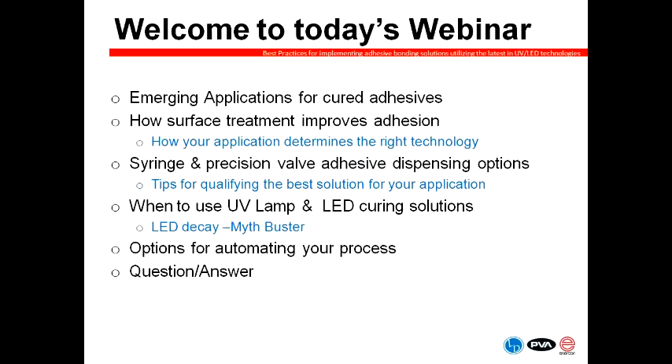We'll talk about when to use UV lamp and LED curing solutions, and Mike will bust one of the myths about LED decay rate. We'll also talk about options for automating your process, and again, we'll reserve time at the end for a question and answer session.

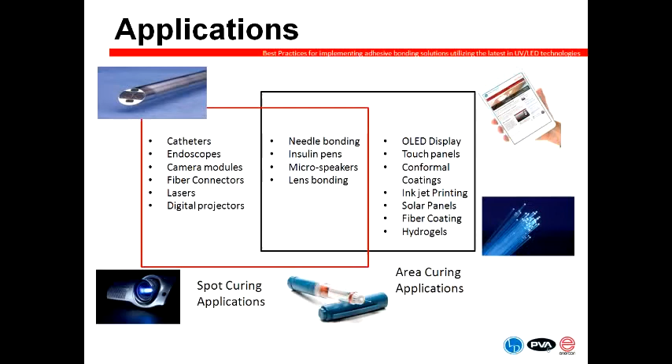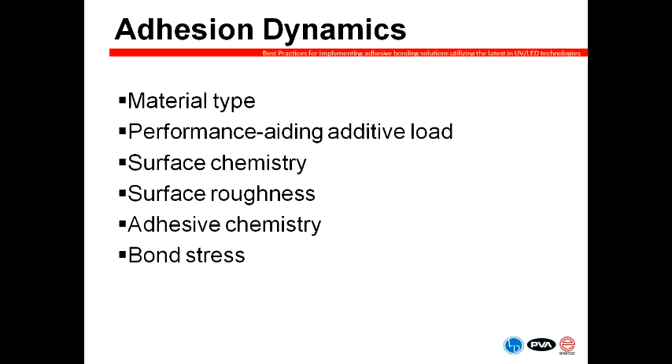For example, some materials are inherently easier to treat than others. A difficult material we see quite often is anything in the fluoropolymer side. These tend to be very difficult to treat, although we do have some technologies which will allow that. Chemistries of both the adhesive and the part you're treating play a role. Ultimately, we need to find a technology that helps alleviate any challenges that you face.

Contamination is also an issue, and that can be everything from mold release to maybe a part that's been sitting around for a number of months and is just dirty or dusty. Additives which migrate or bloom to the surface can be a surprising issue.

Sometimes one of our customers will run a part, treat it, and bond to it one week, and then a week or two or three or four later they run the same part, maybe the same batch, and they're having problems. Often we'll find in those cases it's blooming additives that cause their issues.

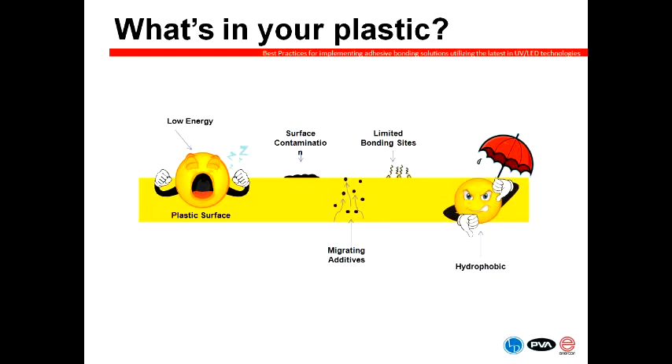The final piece is limited bonding sites. All of these contribute to a surface being hydrophobic or not wanting to accept an adhesive.

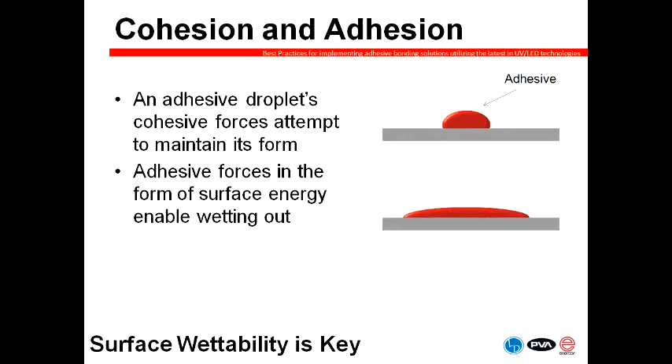This contrasts with the lower image, where the adhesive wets out, lays down, and ultimately forms a strong bond with the two parts you're looking to bond together. What we are doing by preparing the surface is lowering this cohesive force and ultimately creating a stronger bond.

You have a variety of solutions to help prepare the surface for your part. You can use a liquid primer. This is a commonly used process that faces a few challenges. One, it's a secondary process that you either have to apply by hand or with another piece of equipment. And then you also have environmental concerns as well as the cost that goes along with the primer you use.

Mechanical preparations, such as skiving, maybe in the folding carton industry - this is another case where there's a wear part that you're going to run into. There's cost associated with that, there's time, and it tends to create a fairly dusty environment.

Vacuum plasmas provide a solution to both of these first two items, in that you take a batch process, put your part in, and use a plasma technology to treat the entire surface. Fairly effective, however, they are fairly capital and time intensive. They tend to be batch processes, so your throughput tends to be a bit lower.

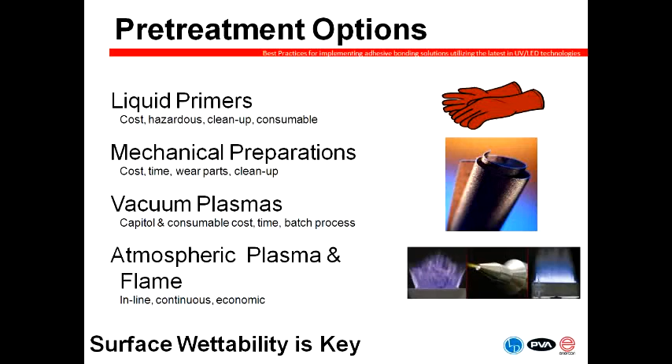Throughput is one of the areas where atmospheric plasma and flame plasma solutions tend to shine. They are inline, continuous, can be robotic, and fairly economical.

One of the questions we get quite often is, what is plasma? I tend to describe it as an ionized gas. More correctly, it's a mixture of charged ions and energetic electrons in equilibrium.

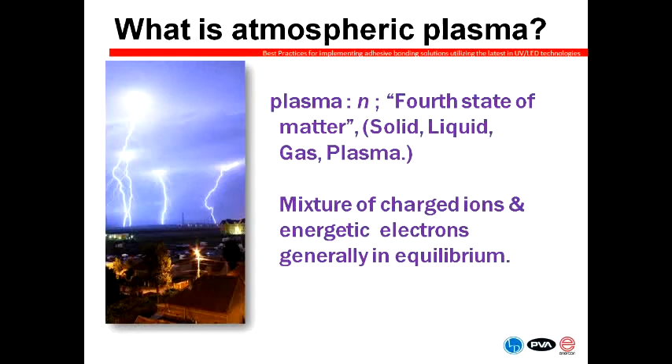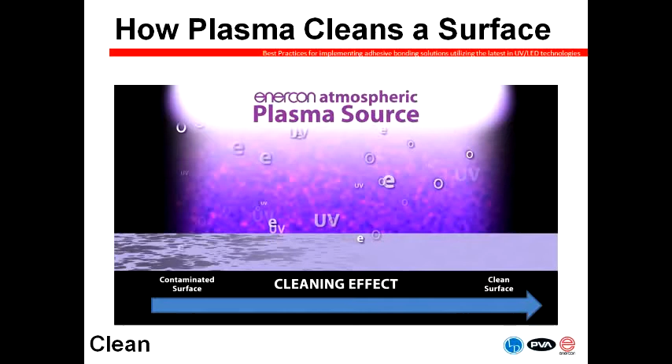One of the barriers to surface adhesion I mentioned earlier is a contaminated surface. This can be organic or inorganic materials on the surface, essentially low molecular weight materials. The charged ions and energized electrons present in the plasma treating process help clean and remove this contamination.

Cleaning a surface is not the only thing we're doing when we plasma treat. In addition, we are creating more bonding sites by micro-etching the surface. In some applications, we take it even further by adding a reactive gas into the process, which leaves a functionalized molecule on the surface designed to enhance adhesion with specific chemistries.

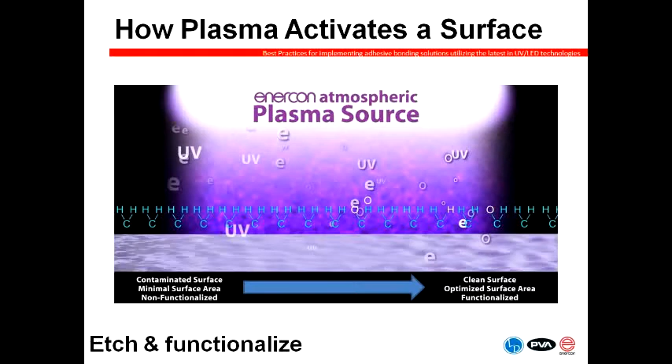So now I want to talk a little bit about what the different types of plasma treating systems are and how you would go about selecting one for your application.

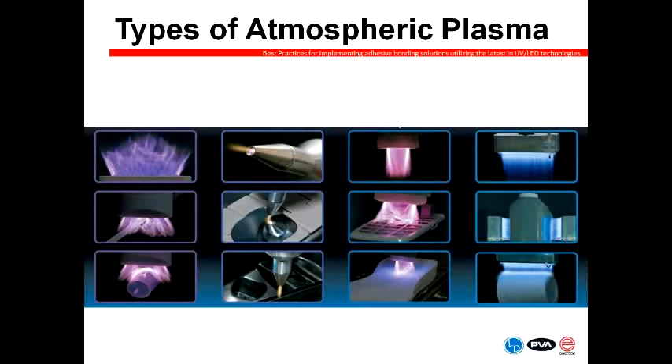So this is a great gallery of the different types of plasmas that we'll talk about. I'll review them here quickly and then we'll go into depth a little bit more. So the column on the left you see, that is our blown arc plasma treating solutions. The second column are what we call blown ion plasma treating solutions. The third column is an example of variable chemistry plasma. And the final column all the way on the right are examples of our flame plasma treating technology.

So blown arc plasma is created by passing a high voltage electrical discharge between two electrodes. If you look at the picture on the top, you see the purple discharge coming out. There are two metal electrodes right beyond that, and the charge jumps back and forth between these two metal electrodes in the head. It's useful for a wide variety of applications. Generally, it treats anywhere from 2 to 3.5 inches with a single head. Multiple heads can be combined for wider treatment patterns.

An important thing to remember about blown arc is that they can only be used to treat non-conductive materials, that is, any non-metallic materials. This is important not only for the material that you're treating, but also whatever carrier you are using to move your part down the line. This tends to be best for slower speed applications, say in the neighborhood of 30 feet per minute.

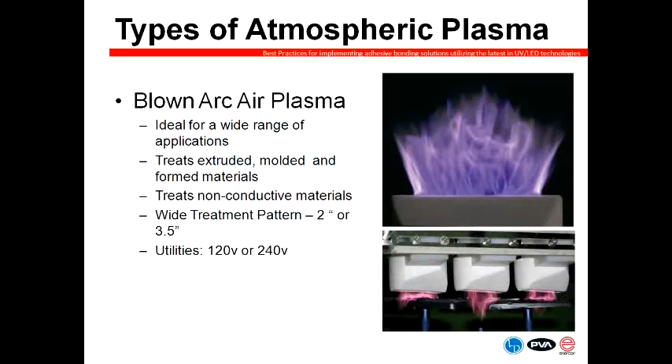The secondary plasma technology is blown ion plasma. The plasma here is generated inside the head, and the resulting ions are blown out via compressed air, and that's the yellow and purple discharges that you see in these pictures. It tends to be a very versatile treatment method in that we can treat both conductive materials and non-conductive materials. The treatment width is a bit narrower than blown arc systems at about half an inch wide.

And these are particularly great for adhesive applications. They're often used to treat glue tracks in automotive headlamp applications, glue flaps, and folding carton applications.

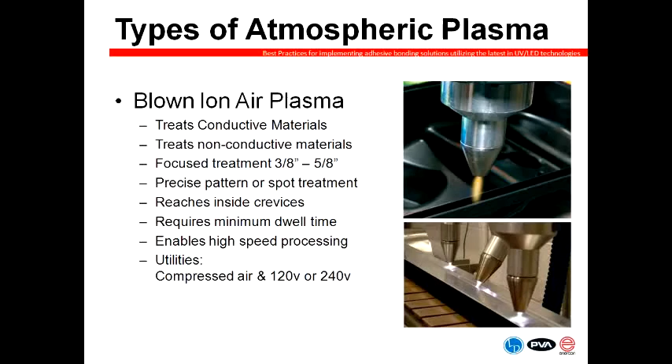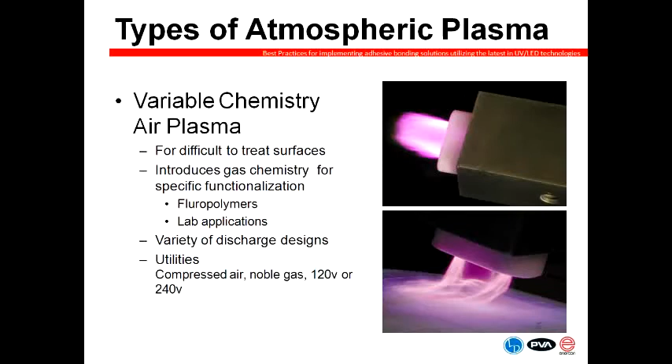Variable chemistry plasma is very similar to blown arc, except that we are adding an inert gas into the mix. This technology tends to be used with materials that are difficult to treat. We are able to produce this technology in two formats. What you see in these pictures is about a 2-inch treat width that's used for a variety of objects.

In addition, we're able to custom design a system for flat and wide objects. This could be a flexible material or something rigid like a piece of glass or a piece of plastic.

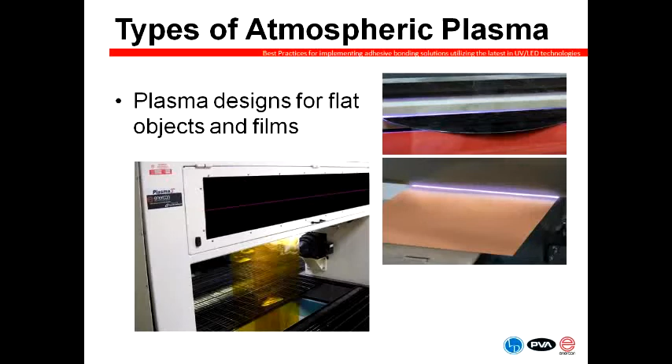The final technology that I want to share with you today is our flame plasma treating technology. Flame treating is probably the technology that most people are familiar with, as it's been around for many years. We've improved upon this technology greatly to create a safe and consistent treatment method. With flame, you're able to treat both conductive and non-conductive materials at extremely high speeds.

The flame's width can vary from as small as 2 inches to over 16 with our standard products, and we will custom design products for even larger than that. The effective treatment area of the flame is also very deep, which allows you to treat objects with great deals of contour.

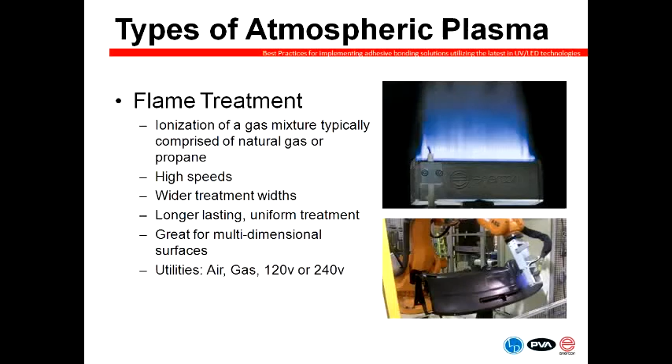So how do you select a treatment technology? What I like to typically tell our customers is try to come in with as open mind as you can. Don't say, I want to use a blown ion or a blown arc technology. Let's take a look at what material you're trying to treat. We have a bit of knowledge as far as, does this material treat better with this system or another system?

The conductive or non-conductive piece comes into the equation like we talked about. The area to be treated, is it a small strip? Is it a large piece? That will impact as well. How is the part handled? Is it traveling down a conveyor? Is it in some sort of puck? Is it rotating on a table? Or is it some sort of robotic application? Those all come into play.

Speed or cycle time that you're trying to achieve is also an important bit. I mentioned with our blown arc, they tend to be a little bit slower. Our blown ion and flame systems tend to be a bit faster, and in slow speed applications probably aren't the right choice.

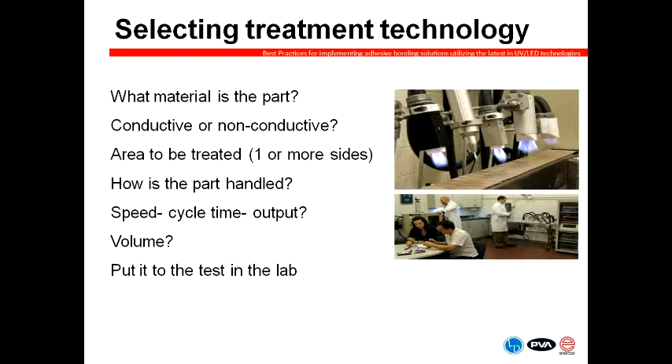All of these we like to do before we take on any application is put them to the test in our lab. We offer free lab testing to determine which technology or technologies might be the best fit for you.

What we're seeing on this slide is a test we conducted with an adhesive company on a polyethylene substrate with UV cured adhesives. The far left bar shows the control sample, which was not treated, and the two on the right, one with blown ion and one with flame, show the bond strength was 3.5 times greater after plasma treatment. The effect can be pretty significant when you choose the right technology combined with the right adhesive and the right curing solution.

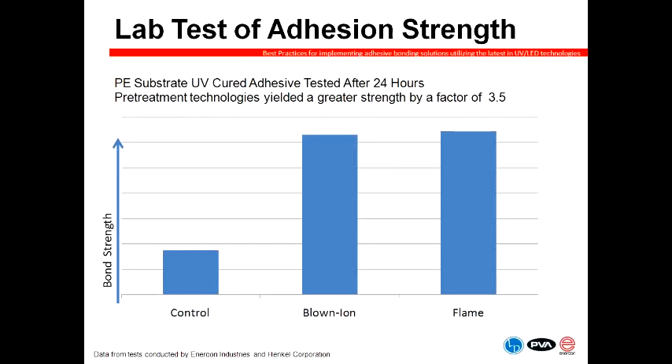To summarize the technologies quickly: blown arc systems are not good for conductive materials, but they're good for wide surfaces and require the longest amount of dwell time. Blown ion systems can treat conductive and non-conductive materials, can treat wide surfaces with automation or multiple heads, and require a short amount of dwell time.

Variable chemistry plasma systems are not able to treat conductive materials. They're good with wide surfaces and tend to require a little bit longer dwell time. Flame plasma systems will treat both conductive and non-conductive materials. They're great for wide surfaces since we're able to build a wide variety of burner sizes, and the dwell time required is very short.

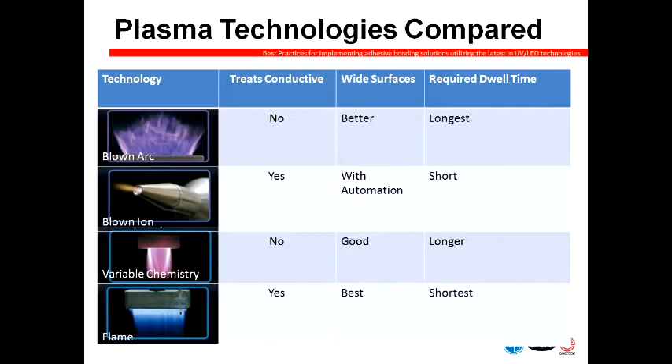Now I'd like to hand the reins over to Frank to talk about syringe and precision valve adhesive dispensing options.

Thank you very much, we're going to go to the next slide. I want to thank everyone for being here today. I was asked to come in and discuss our abilities on the dispensing side for UV adhesives, and they range quite widely across the spectrum, from very simple to very complex solutions.

Typically, to start the evaluation process we want to identify what the best process is from the beginning: what the production requirements are, what type of consistency and quality requirements are being demanded of the application, what human resources are available, and the complexity of the task, as that may contribute to the complexity of the solution.

When you talk about dispensing equipment, you can start with something very simple, like a tabletop and a syringe, and work your way up to a very customized piece of automation equipment. Evaluating the budget and what you expect to get out of a potential solution is always a consideration. These investments can vary widely, from a tabletop solution for under $500 to over $50,000, or more for a very custom solution.

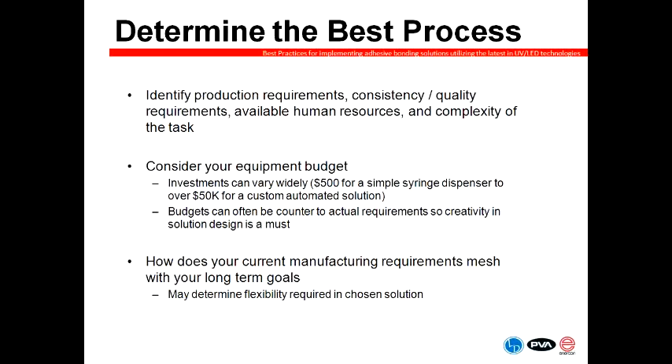I frequently talk to people looking to have capacity and capabilities well beyond what they'll currently need, more so for flexibility's sake than anything else. We can go ahead, Mark.

Some things to always consider when designing a dispensing system: one of the first things we ask is how the material is going to be packaged. Can it be handled very easily? Syringes through drums and anything in between can all be accommodated, but identifying the packaging type in conjunction with the specific chemistry will start to allow a dispensing company like PVA to identify the appropriate fluid delivery system to move the material to the dispensing apparatus.

This can be a factor when determining the amount of pressure required in large production equipment, and subsequently the complexity of whether we're talking about a syringe adapter and mount to a valve, or a large 55-gallon drum pump. Again, all can be accommodated.

It's just a matter of communicating what options there are. Many times the end user may not know this, and that's not unusual, but it can be worked around and addressed fairly readily when working with material partners. Most dispensing companies have those relationships to create a triangle with the dispensing company, the chemical company, and the end user, to determine the appropriate volume to be utilized for a particular application.

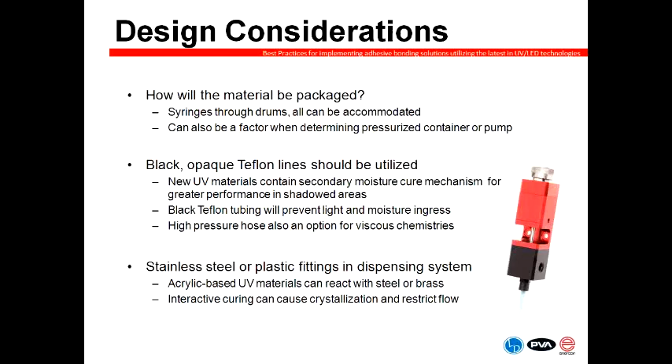We can go ahead, Mike. Or I'm sorry, Mark. Did we skip one there? There you go, thank you.

Another consideration when designing the equipment is evaluating the shear sensitivity of the material. High shear pumping systems tend to come into play as you're looking at a higher degree of accuracy in your dispensing system. Oftentimes gear pumps or other type of metering processes can be utilized. Anything that's got a high shear sensitivity can cause crystallization in the chemistry itself, so evaluating that in the design to avoid the seizure of those pumps is a critical aspect as well.

Typically, peristaltic or diaphragm pumps are preferred when possible, as opposed to shearing UV materials.

Also evaluating what the dispenser or sprayer coverage area is. Now that we've got the material going to the appropriate valve to do the task, what is the appropriate valve at that point to do the task in question? Are we doing a bead application, a spray application? And then also assuring that UV light can access the dispensed materials. In some applications we do have end users that, frankly, rely on the shadow, the secondary cure mechanism, in a shadowing effect, to remedy that situation.

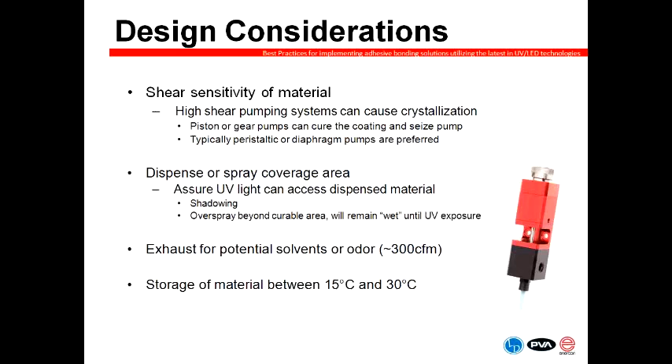Thanks, Mark. You can go ahead.

Jumping on material temperature sensitivity, typically most coating and adhesive dispensing manufacturers will work with a chemical company to evaluate what type of variation there is in viscosity versus the temperature of the material. If we find that the chemistry is very reactive to changes in temperature, and these things can be as silly as a tank sitting next to a heating duct or an open window that may affect the temperature of the material throughout the day, all things I've seen over my years here, those can be stabilized. So controlling the temperature of the material tank, the fluid lines, and the valve itself are all options if we find that the material is very sensitive.

This comes into play more so in a time and pressure scenario. We're relying on consistency in the chemistry to create a consistent application, because there is no metering in the process at that point, so these are more so for our most simple dispensing designs. We can improve this by introducing some sort of diaphragm or gear pump system that will actually proportion the material regardless of small variations in viscosity. So again, this goes back to a design consideration more than anything else.

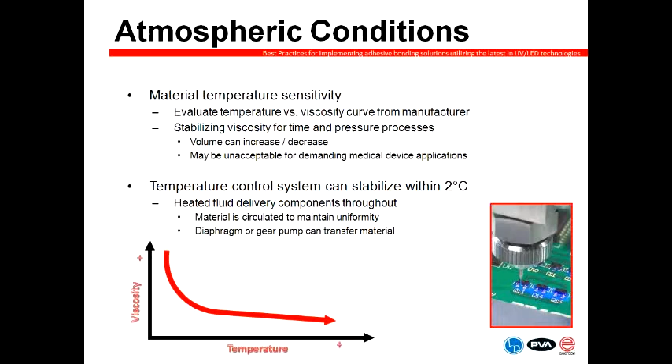We can go ahead, Mark.

This chart is a brief overview of the complexity we're looking at. Typically we'll start from a very manual system to a very automated system, and somewhere along the line we can figure out, based on the conceivable budget, volume requirements, and level of automation required, what's appropriate when determining the right piece of equipment to address this.

You can start very manual with a handheld wand on a tabletop, very inexpensively. Typically these are time and pressure solutions, so the consistency of shot-to-shot repeatability is typically upwards of 10%. They can go lower, but that's probably on the high side.

Then we can introduce various stages of automation, whether semi-automated with a fixed valve position and controlled position of the part itself, improving on relying on the operator to consistently move by hand for the dispensing position—all the way to a fully automated unit that can consistently place both the part and the valve in a reliable position.

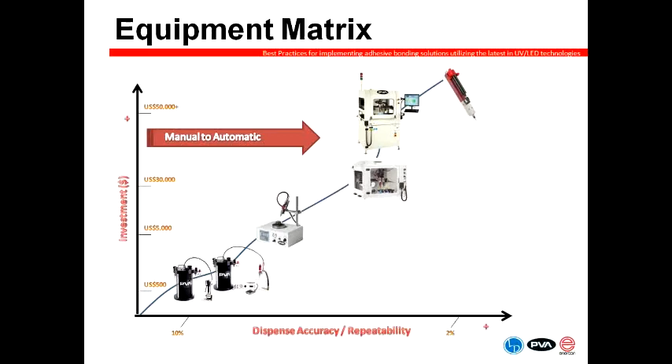The manual adhesive dispenser is typically a time and pressure process via syringe or a dispense wand. This can be done by hand, and it's typically done by hand. You can also add a timed controller that allows shot size consistency—very small boxes, about book-sized, with a digital timer, initiated either via a foot pedal or a hand switch.

All this provides more shot-to-shot repeatability, but if there's motion required from the operator during dispensing, you're still relying on them to assure the desired coverage area is completed. This is the lowest cost equation for getting into dispensing, and the shot repeatability can be nearly 10%.

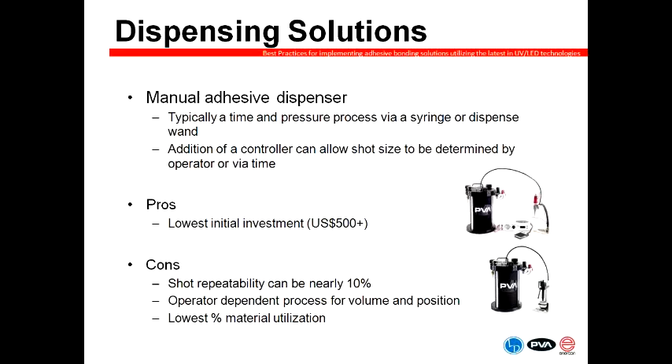For highly accurate, repeatable processes, most customers want some sort of automation. These tend to be more general dispensing applications because you're operator dependent for both volume and position, and this offers the lowest percentage of material utilization due to waste and inconsistency in part or valve position.

A semi-automatic dispenser can combine either a time and pressure solution or a metered solution with some basic repeatable motion. In this scenario, we can address one or both cons of handheld dispensing, providing added accuracy with the dispense shot position, the shot repeatability in a metered solution, or both. There's a higher level of initial investment to get that type of consistency, but the repeatability can vary by the solution.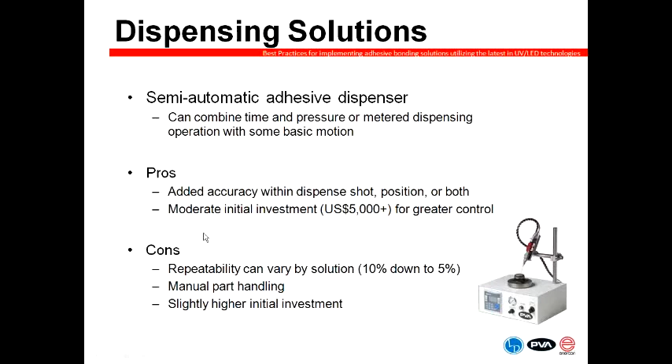If you're staying with a time and pressure method—turning the valve on and off as opposed to metering—you can go anywhere from up to 10% down to 5% or below. The con here is you're still utilizing some manual part handling; it's a trade-off between that and getting added positional accuracy. It's a slightly higher initial investment, but the trade-off is repeatability within part of the process.

The higher level of automation takes the part itself and the valve and puts them in a robotic positioning system. Here you can utilize motion to create a highly repeatable, accurate position for dispensing. Regardless of the dispenser or the robot, dispensing accuracy always falls back to the fluid delivery design. As accurate as a robot can be, these are typically plus or minus 1/1000th of an inch repeatability on each axis.

Shot-to-shot accuracy, whether for a potting or bead application, always falls back to the fluid delivery design. A time and pressure method still won't get you out of the 5 to 10% volumetric accuracy range, regardless of adding a repeatable robotic positioning system. To get those improvements, we need to look at adding some sort of metering device.

The advantages here are that these are typically used for high volume, repeatable processes, so they can be conveyorized or not—many units we manufacture are in-line for high volume production. You get much greater material utilization because of the positioning system, so your material waste goes down significantly.

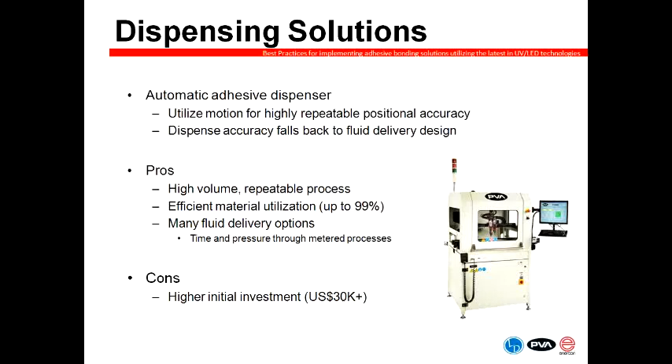In summary, while production requirements will often dictate the dispensing solution, probably very much like we discussed on the surface treatment side, we also like to see our customers come in with somewhat of an open mind, because very many times the solution is not so obvious. There's oftentimes multiple solutions to a dispensing problem or application, and qualifying the appropriate or best solution is really the only way to discover what's going to work best in production.

Conceivably, 2 or 3 dispensing valves, maybe a couple of different robotic cells, could be utilized to do this, and just finding the best one is really where a service and sales engineer can help you determine that. But most applications do come with a general idea of whether there's some sort of demand for automation, and typically that allows us to focus on where our starting point for this application is, and where we want to go as far as designing a system.

Within each segment of solutions, there are various options that we can look at to meet your specific requirements. But the appropriate dispensing partner should be working with you to determine not necessarily their off-the-shelf solution, but more so what's best suited to fit your application, not just now, but in the long run, to make the most efficient use of your production requirements.

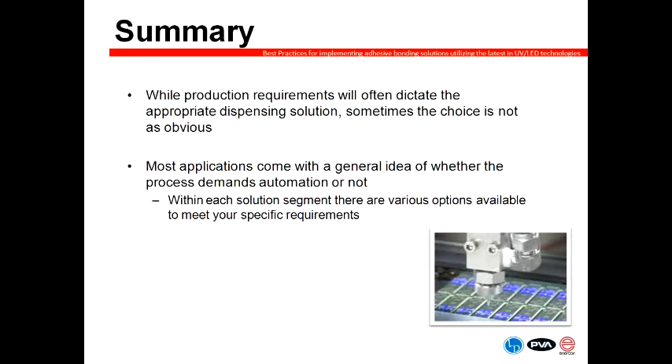I'm going to talk to you for a little bit now about when to use a UV lamp versus an LED curing solution. So, 2 different technologies, both being used today in UV curing applications. Now, at Lumen Dynamics, we design, we manufacture, and we support our customers in both lamp and LED technologies. I will try to give an unbiased opinion on where each one has its benefits, and also let you know some of the limitations of each technology. So if we can go on to the next slide.

I think it's important, before we talk about the different light technologies, to give a quick overview on the way that the curing reaction takes place. UV curing starts with the photoinitiator that's included in whether that's a UV curable adhesive, ink, or coating. And the curing reaction starts when you have sufficient light of the correct wavelength range that is absorbed by the photoinitiator.

That's an important point to note, because every photoinitiator has a very specific spectral range where they'll absorb light and start that reaction. So it becomes obviously critical that you match the spectral output of the light source that you're using with the absorption range of the photoinitiator.

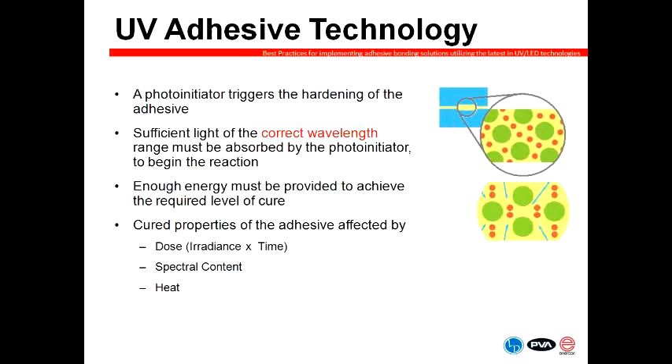It does generate heat, but the light source used, the light technology used in the curing process, can have significant effects on the amount of heat seen by the parts. If this is a consideration with your parts, and often is in many different curing applications where heat is trying to be avoided, this could be one of the areas that determines what technology is best for you.

One limitation, though, is that they're really limited to small spot sizes, and that's how we're able to achieve the high irradiance level of 10 watts per square centimeter, by using a lens to focus that energy into a very small spot. So when you look at the actual optical power coming from an LED spot source, it's only about 500 milliwatts of optical power. It's really not that high power, but because we focus it, we can generate significant irradiance in a small spot size.

Now if you look at a lamp spot curing system, you've got significantly higher irradiance available, up to 30 watts per square centimeter, much higher than you would use for most curing applications. So most spot curing systems will give you the option of adjusting the output down from 30 watts per square centimeter. You can see the spot size is also much larger than available with LED, and that's because a typical lamp spot curing system has about 10 times the optical power of an LED system. So you have the flexibility of using larger spot sizes, going to multiple spots, and the potential of curing faster because you have a higher amount of power available for the curing process.

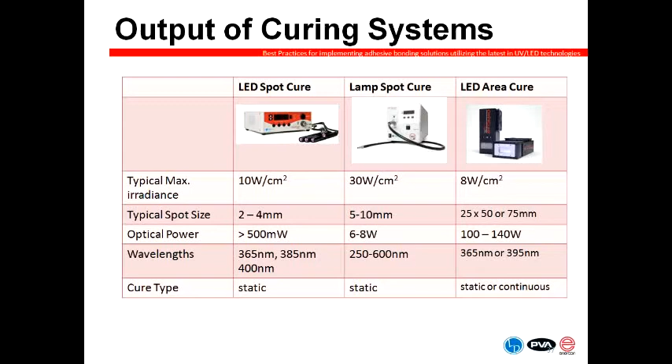So that's the output power. If we move on to the next slide, I'm going to show you the differences in spectral content between a lamp-based system and an LED. This is really one of the key differences between lamp and LED technology.

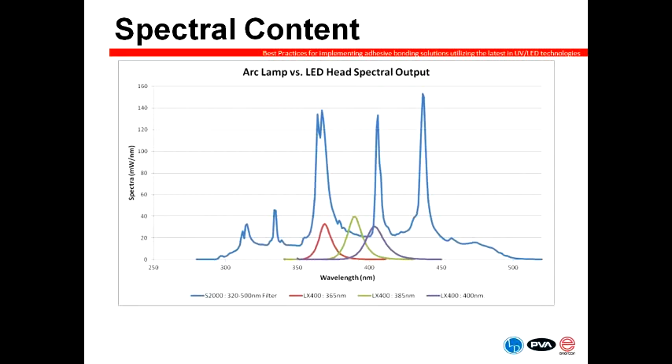You can see those 3 different wavelengths available at 365 nanometers, 385 nanometers, and 400 nanometers. You're now looking at very narrow bandwidths, typically about 15 nanometers. Lower power, but this narrow bandwidth means that with LEDs you need to be very specific on which wavelength you use, again matching that up to the photoinitiator.

So if we go on to the next slide, you'll see that one of the key differences and things to keep in mind when looking at the different technology is the adhesive or the coating or ink compatibility.

We talked about needing sufficient light of the correct wavelength range to start the reaction. When using a lamp-based system with a very broad spectral output, it's much easier to match the output of your light system to the requirements of the photoinitiator. When looking at an LED with its very narrow bandwidth, it's very critical that you understand the absorption range of your photoinitiator, because you need to match up the bandwidth of LEDs you're using with the requirements of the photoinitiator.

In some cases this may limit your choice of adhesives. Depending on the photoinitiators being used, you may not be able to match up to the LEDs available. Typically, we see LEDs available at 365, 385, and 400 nanometers. There are LEDs available at lower wavelengths, but today, from a commercial availability standpoint, 365 nanometers is really as low a wavelength as is commercially available.

So in this case, if adhesive compatibility is one of the key factors you're looking at—this could be, for example, if you use multiple adhesives with different photoinitiator absorption ranges—you're certainly going to have an easier time matching up those requirements using a lamp-based curing system.

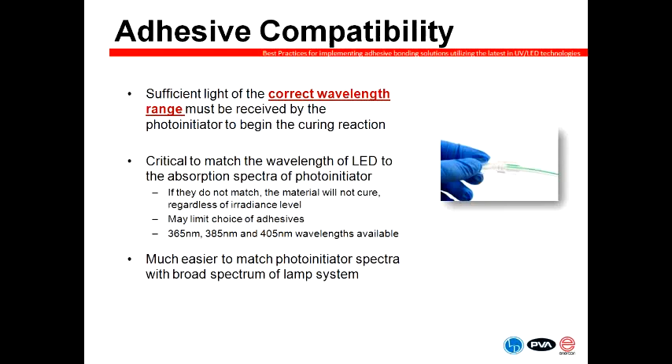So if we move on to the next slide, on the flip side of that, the real benefit of the LED is that because you're using that very narrow spectrum of light, you're able to minimize the heat generated during the curing process, because you're being very specific on the wavelengths of light to the requirements of the photoinitiator.

Now, in a curing reaction you have light that's being absorbed by the adhesive, but you also have light that can be absorbed by the parts. Things like dark or colored materials will often absorb visible light, and many plastics will absorb light below 300 nanometers, depending on the plastic being used.

So if you're introducing a broad spectrum of light, such as a lamp-based system, only a portion of that spectrum may be used by the adhesive, whereas a large portion may be absorbed by the parts, generating heat. Now, with lamp systems we do use bandpass filters to filter out some of the unwanted wavelengths of light in order to reduce the heat. But certainly the narrow spectrum of the LEDs ensures the lowest amount of heat.

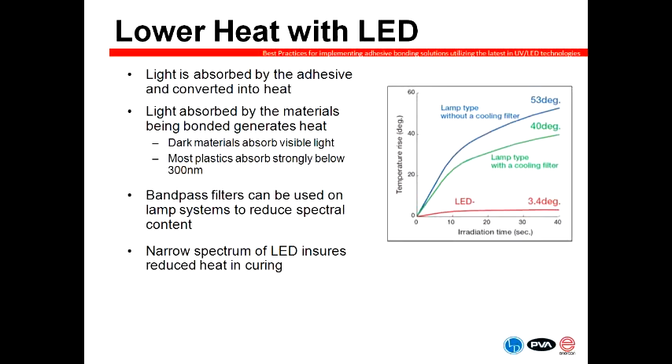So for many applications where heat is critical—and I mentioned before applications like OLED displays or touch panels, where it's really critical for their yields that they minimize the amount of heat—that's why some of these applications are now looking to transition to LED, because they have the benefit of that narrow spectrum and reduced heat during the curing process. On to the next slide, please.

Now, one of the things to consider with the curing process is the surface finish. This is one of the areas that comes up a lot when people are looking at using LED technology. With a number of different adhesives and coatings, particularly free radical adhesives and coatings, they're susceptible to what's called oxygen inhibition. What that means is even though you may cure the formulation, you end up with a tacky surface.

And there are ways you can improve upon this situation. There are specific adhesive and coating formulations available to minimize the problem, and Frank talked about some of these with a secondary cure mechanism, such as a moisture cure. So you have different formulations available to improve this.

But another way that's typically used to improve the surface finish on adhesives and coatings in particular is through the use of UVC, short wavelength UV. You can see in the chart to the right there's a blue highlight for the area of UVB and UVC wavelengths. That's very typically used to improve the surface finish on different UV curable formulations.

Unfortunately, as I mentioned, with LEDs you can see the peak just to the right of that at 365 nanometers—that's as low as the LEDs go today. So you don't have that short wavelength light available to improve the surface finish. So again, this is another area to keep in mind if surface finish is important in your application, and the formulation you're using isn't compatible with the LED to produce a nice, hard, glossy finish. This may be a limitation of using LED, and lamp-based systems may be something to look at in this case. So moving on to the next slide.

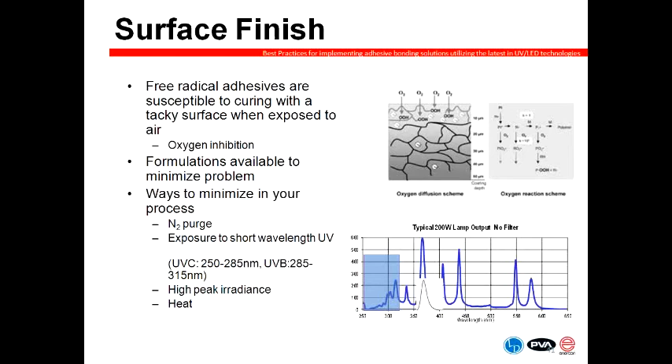Certainly one of the areas where LEDs provide significant advantage, and one reason a lot of customers are looking at transitioning to LED, is the lifetime. Typically, LEDs can get 20,000 hours plus of lifetime. This really depends on how hard you drive the LEDs and the temperature of the LED itself. It's key that you maintain a junction temperature within the specifications of the LED to get that lifetime.

Mark talked about one of the myths of LEDs, and one thing we hear quite often is the misconception that LEDs do not degrade over time. What this chart shows is that even though you get very long lifetimes, LEDs do degrade over time. So another consideration in your process is to set your LEDs at a level to minimize degradation, but also to measure the output as your process goes to ensure you're getting repeatable output.

If you look at a lamp-based system, these typically last 3,000 to 4,000 hours, so the 20,000 hours of an LED is a significant advantage and can help reduce running costs for your process. That's one of the reasons we have people looking at LED as a technology for their curing process.

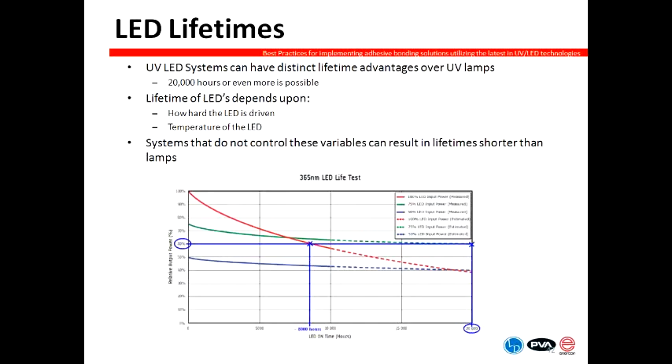Along with lasting longer, when you look at LEDs from an environmental perspective, they have certain advantages that people are looking at. We have people looking at UV curing as a green technology because of the materials being used. The materials are very low in solvent content, so the VOC content is much lower than other solvent-based inks or coatings, for example.

But the other thing with LEDs is that they require significantly less electrical power to run versus a comparable lamp system. We have a number of customers in applications such as fiber coating, where the savings from electrical power in switching from lamp to LED is enough for them to consider making that transition, and the running cost savings are enough to actually pay for the capital costs of the equipment. That's definitely a consideration when looking at whether LED or lamp is the best light technology for an application.

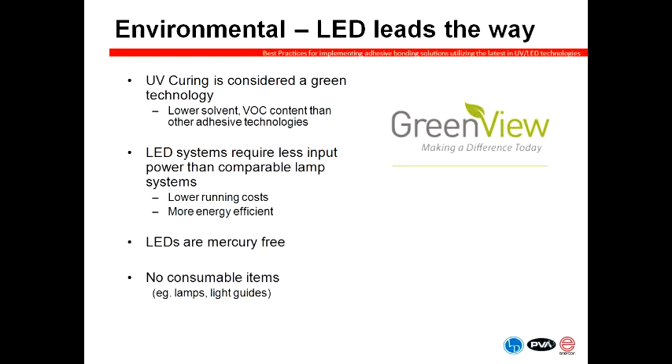So a quick summary on what we advise customers when deciding whether to use lamp or LED-based technology in their curing. The lamp has higher power. The adhesive compatibility of the broad spectrum is easier with the lamp versus the LED, where the narrow spectrum helps minimize heat, so for heat-sensitive applications LED has definite advantages. Also, things like longer lifetime and lower energy consumption can provide ongoing cost savings with LED. Lamp may have benefits like surface finish as well.

What we've seen is lamp curing is an established technology, done for many years, versus LED, which is emerging, and there's a lot of people interested. What we recommend to anybody looking at potentially transitioning from lamp to LED-based curing technology is that these are very different light technologies. Whenever you're switching, you need to take into account that you will potentially get different properties from your adhesive or coating. So you need to look at developing a new process, and new testing parameters, to ensure the materials you end up with after curing meet the requirements for your parts. If you do that, there may be definite benefits to LED curing technology.

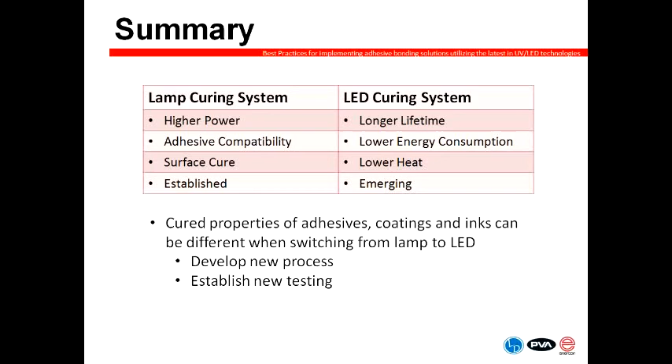With that, I'm going to turn it back over to Frank Hart, who's going to look at some different options for automating your process.

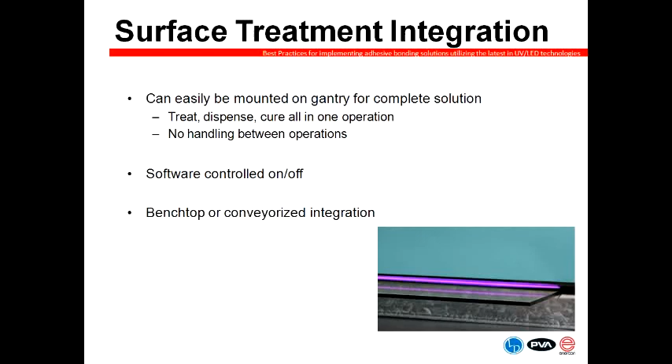We can take the surface treatment units and software control the initiation of these units on and off, again providing full automation motion, and they can typically be integrated on any type of robotic system, from a benchtop to a fully inline conveyorized system. Again, just to speed up the manufacturing process and reduce handling time.

UV cure integration is very common these days, and the LED and light guide integration can be done on a robotic cell to immediately cure and achieve favorable results. This can be done in a variety of ways, and it's financially viable compared to a larger inline cure oven.

It does affect cycle times to a certain degree because there's a secondary step within the dispensing process, but it can also limit undesirable flow or uneven cured surfaces by controlling the time from dispense to cure immediately within the dispensing process.

This is ideal for smaller coverage areas, dots or beads, though companies like mine are always working with people like Mike at Lumen Dynamics to push the envelope and open up that window for us. We're always looking for new technologies to further those processes and capabilities for our customers.

This can eliminate the need for a full-sized inline oven, reducing floor space and significantly reducing the initial capital investment for a solution.

Very much like the surface treatment system, the UV LED systems can be software controlled on and off and are safe to be handled on a benchtop or conveyorized system as well.

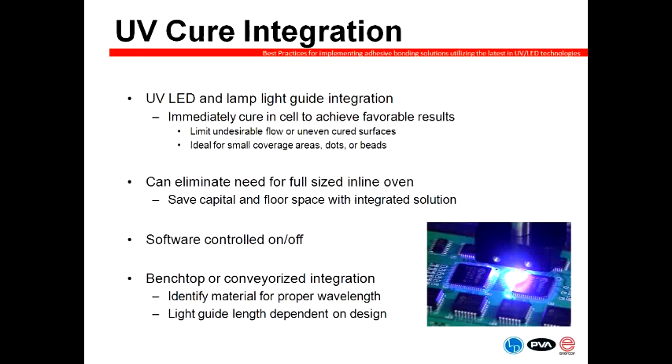We are at 1 hour, and we are going to open up to a few questions here in the final moments. Again, a quick review of some of the things we learned today.

Surface treatment can improve bonding. It's very critical to define your application so that you know you're getting the right equipment solutions with your vendors. And LED curing is certainly a highly effective alternative to UV lamps, but again, depending upon your specific application requirements.

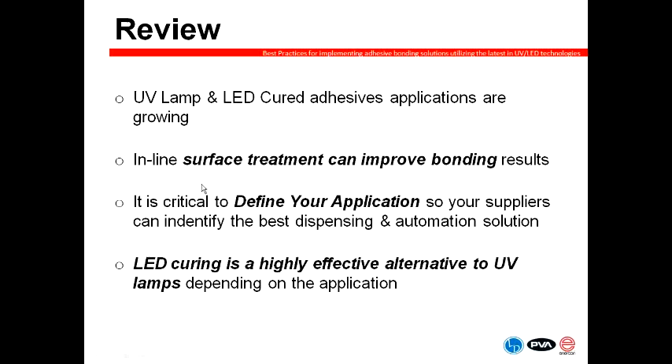I have one here for Mike. Mike, the question is, the person's interested in changing from a lamp curing system to an LED. What is the process they would need to take to make this transition?

Thanks, Mark. That is something we work with quite a bit with our customers today. One of the things we look at when making that transition is, first, we need to identify whether or not the adhesive, ink, or coating they're using is compatible with the LED technology. We can actually provide some testing here to help the customer make that determination. The next thing we need to look at is whether or not the LED has enough energy to cure in the time requirements that they have.

Most production requirements have a specific amount of time allocated for the cure, and we need to make sure the LED can perform the curing within that time. Just as importantly, we identify the testing that will go into qualifying what is a successful cure. That can be, in the case of bonding two parts together, a pull test. In the case of printing, it could be something like a scratch test, because the physical properties of the cured parts may be different based on whether it's cured with a lamp versus an LED system.